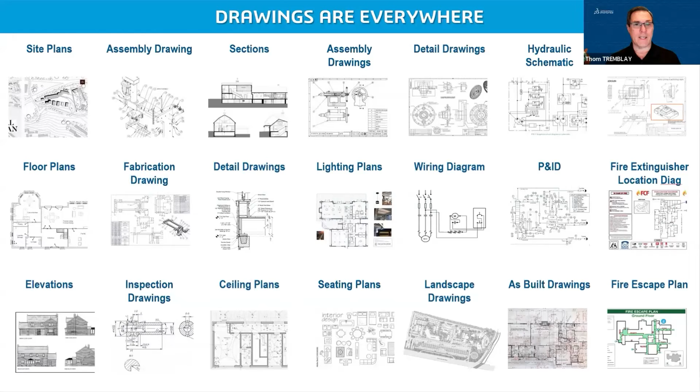There are simply things that are easier to do in 2D, especially in skilled trades, where a schematic or a simple representation can communicate the information needed to get the work done. On the other end of the spectrum are things too complex, even with all our computing power, even with distributed computing, even with the power of platforms like the 3D Experience platform, to capture effectively in 3D. So again, 2D to the rescue, and we don't see an end to this because it's just not going away.

So what does that mean for students? Well, the first thing is jobs. We talk a lot about 3D, but if you take a look at job postings from the last 12 months, you'll see the trend we've seen for years continues: anywhere from 3 to 4 times the number of people are looking for AutoCAD or 2D skills versus SolidWorks. This isn't to demean SolidWorks or say it's not a critical skill, it's just that there are so many more jobs.

That's why we need to keep this effective in our classrooms and make sure students have options and flexibility. I even included Indiana at the bottom because that's the highest concentration of manufacturing in any state in the United States, and even there you'll see double the number of ads. So equipping our students for the future and giving them the most options requires that they still understand 2D.

So let's talk a bit about what DraftSight is. DraftSight is a best-in-class 2D CAD solution. We're focusing on DWG, and we'll talk more about that going forward, but we also want to include some flexibility. For example, we work with 64-bit Windows or Mac OS. We also allow standalone licensing.

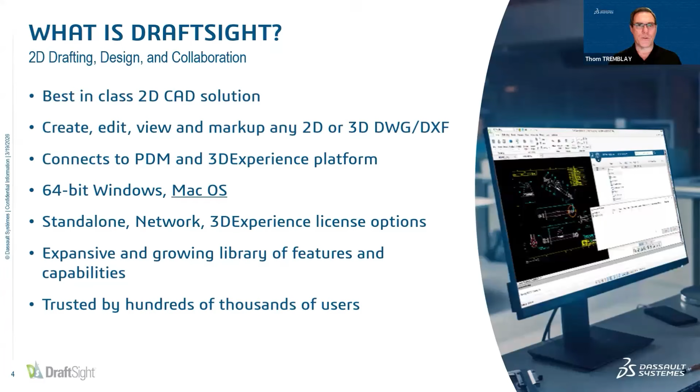We have hundreds of thousands of commercial users around the world already using DraftSight. Now let's talk about the nuts and bolts of how you start using DraftSight in your classroom.

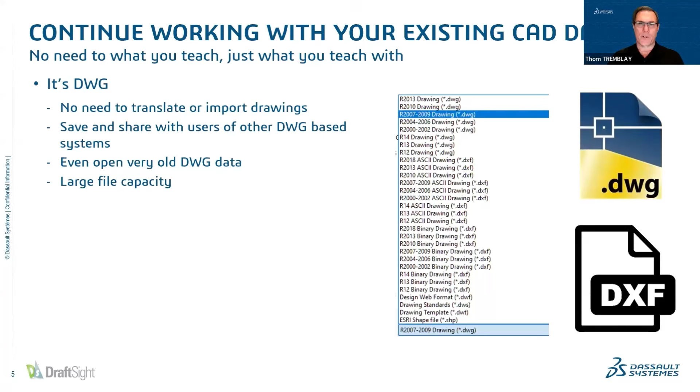First off, I mentioned briefly DWG—it is still a DWG file. In fact, it's still 100% compatible with any AutoCAD DWGs you already have, or if you're using another DWG-based 2D CAD program. So you're not having to recreate all your data for your lesson files. Any block libraries, any attributes in the blocks, if you're using dynamic blocks—which is a great tool to teach, and we have our version called custom blocks—we can reuse existing dynamic blocks.

Once again, you're not having to start over to transition your classroom to DraftSight. And of course, we're using the same viewports and layout workflows. We have external references. So what it boils down to is you can just keep using the same lesson files you already have prepared.

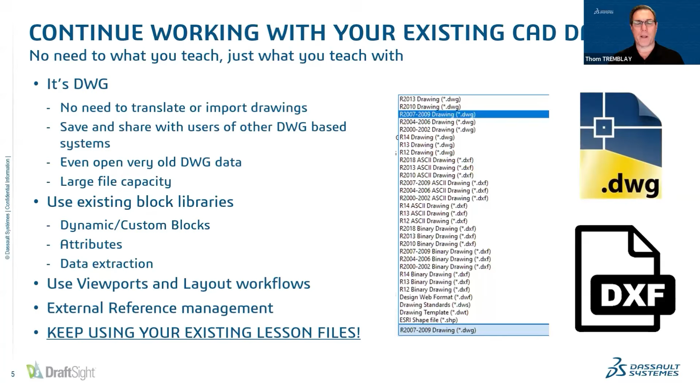That also means you can preserve your skills—you're not having to relearn a whole new tool to start working with DraftSight. Now, DraftSight does have some differences, but we work very hard to maintain a consistent workflow and workspace. It's customizable if there are certain things you prefer, like tool palettes or certain toolbars being open. You can make all those same customizations in DraftSight and work the way you're used to working and teaching. There's command consistency—we have command aliases. I mentioned there are slight differences between DraftSight and, let's be upfront about it, AutoCAD.

We'll focus on that, but where there are differences, we use our aliases. For example, there is no purge command inside of DraftSight. We have the same tool that does the same thing, but it's called clean.

In DraftSight, if your muscle memory kicks in and you start typing purge, it will subtly offer you clean in parentheses. But if you finish typing purge, or get that to highlight in your quick access menu and press enter, you will get the clean tool. It works just like purge, just like the tool you're used to teaching your students to get rid of all that extra stuff out of their drawings. We just have a different name for it.

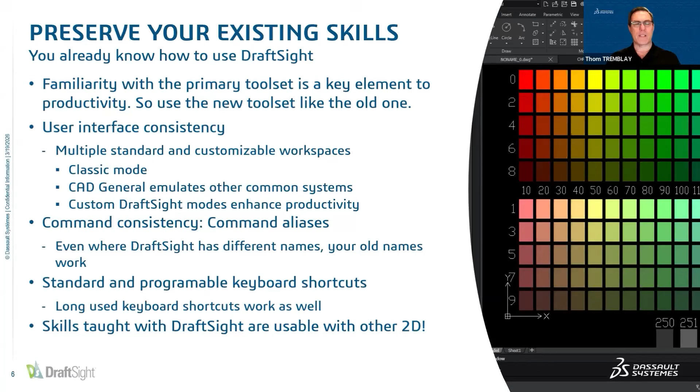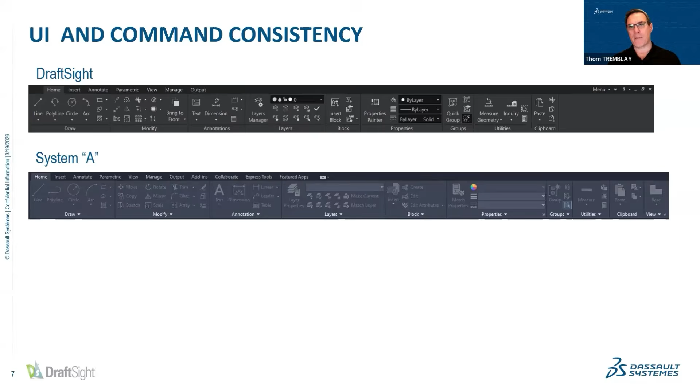I mentioned command consistency. I just wanted to give you a feel for the UI consistency, especially since you might be transferring your lesson files and want to practice and make sure you're comfortable. Here, for example, is the optional interface for DraftSight that we specifically made to map out and look like AutoCAD.

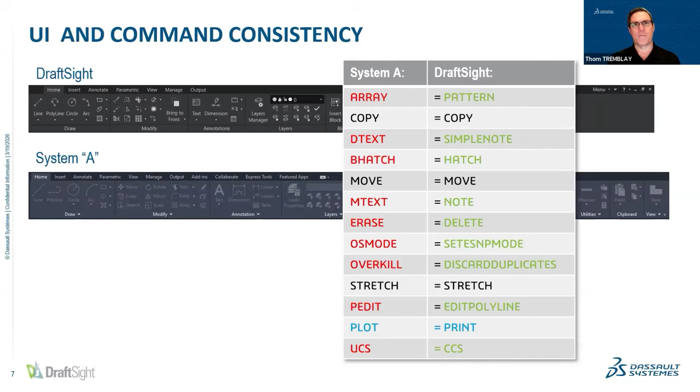And these are command aliases. So you can see we don't have the array tool, we call it pattern. But if you type array, you get pattern, and it works the same. The dialogues look the same. You're going to be able to just be productive from day one. That's really one of the key elements in the commercial space that we succeed with DraftSight: we are the non-disruptive change.

For some of you teaching Revit and who might want to give students an opportunity to learn how to make detailed drawings from the Revit data, our Enterprise Plus and Premium offering, depending if it's network or standalone, has the ability to take RVT files, or if you're teaching CATIA for BIM, the IFC files, and break those down into sections, elevations, details, do scheduling, do all of that work directly in DraftSight from those 3D files. And if those 3D files are updated, you can update the links and it will update the drawings.

It's a really nice workflow, but we are very highly focused on making sure that DraftSight is not only competitive, but starting to step out away from the pack and create new feature capabilities that offer our commercial customers great new workflows that can benefit the classroom as well.

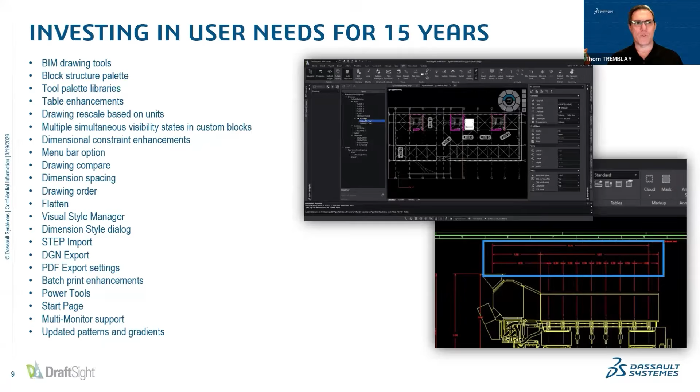I mentioned flexibility. We do have the ability to do network licensing. So if you're used to having labs where you shared licenses across multiple labs, we can go back to that. We also have standalone, as I mentioned. And for those labs already using SOLIDWORKS on a network license, DraftSight works on that same SOLIDWORKS network license manager, so you're not having to stand up a new instance or a new license manager. It's just compatible and ready to start working.

We also have certifications available. We already have an associate level DraftSight certification, which is a great asset for students to have, as well as we are in our final stages of finishing our professional certification.

We did betas this year and last year at 3D Experience World, and I took the exam. I passed it, which is probably to be expected, but nonetheless it's a great tool and it's going to be ready to go before next school season. We should have the professional certification as well. Of course, students, you might want to focus on associate. We've had that up and running for about 3 years now, so it's a standing certification available to you today and available to your students.

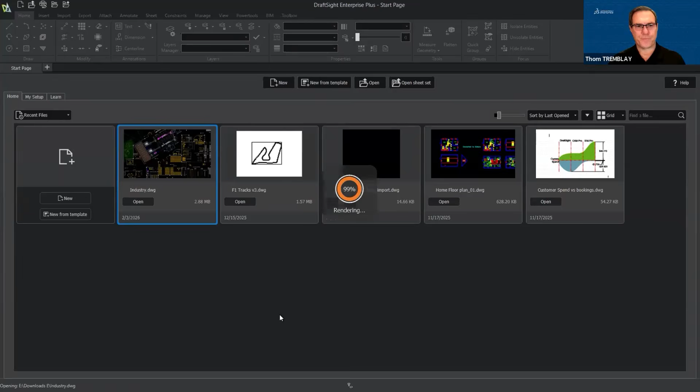Very familiar interface. Let's open up a simple little drawing here. Let's take a look at the interface itself. This is our standard drafting and annotation interface. This is one that we developed based on the most commonly used tools, puts it right up front. I do recommend teaching from this interface.

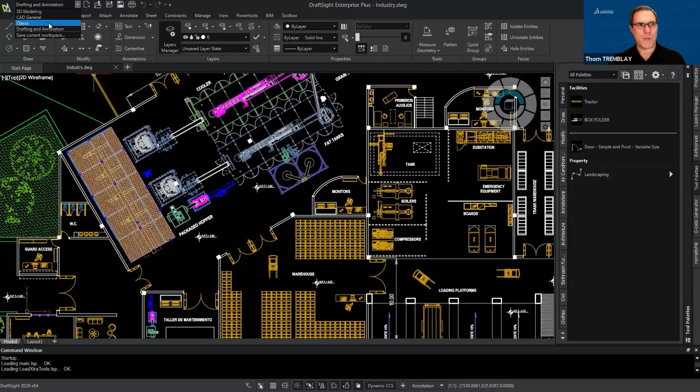However, just to get it right out there in the open, we also have our other workspaces. We have a classic workspace, which is more toolbar focused. And then we also have our CAD General interface, made to make existing AutoCAD users more comfortable getting started. It puts that command layout in very familiar positions. We do have the option of drop-down menus as well.

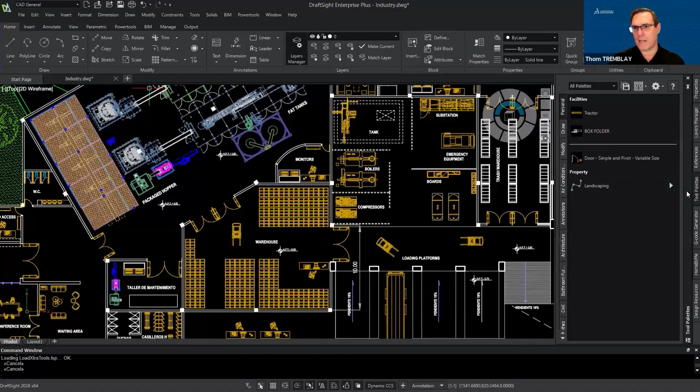We have the option of our tool palettes, which of course are working the way they should, and they still work like tool palettes you would expect, being able to go in and make quick modifications.

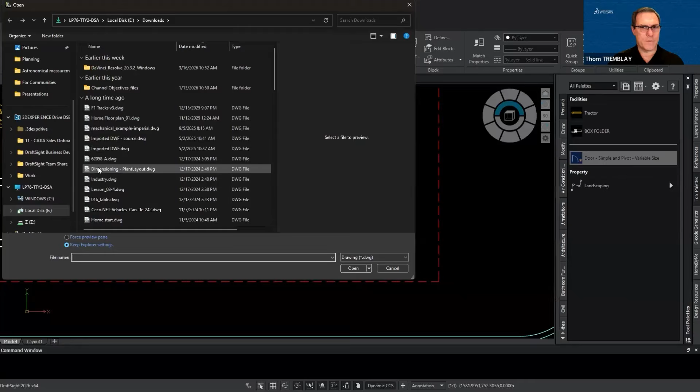This is not the drawing I was looking for, but yeah, being able to develop your model, any of the same tools work. If you're working with blocks, edit properly. If you're working with things like dynamic blocks—sorry, wrong drawing, pardon me for a moment. Oh, that's not the one either. We'll just stick with this.

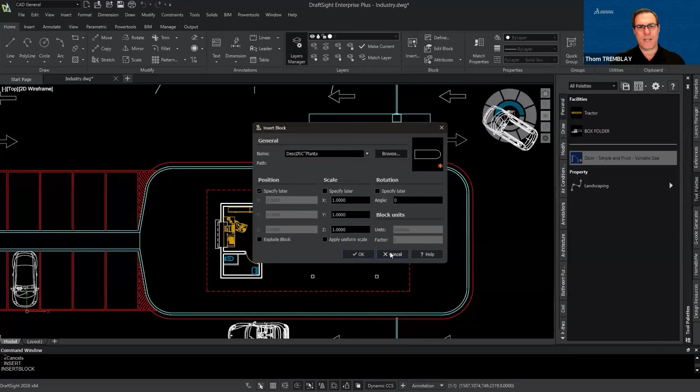But dynamic blocks, any of your command line tools, insert, you get your pop-up menu. You'll have the blocks that exist in here. Being able to select works the same way, being able to specify scale, position, rotation, on screen or in advance, so the dialog boxes are going to work the same. Layers management is the same properties.

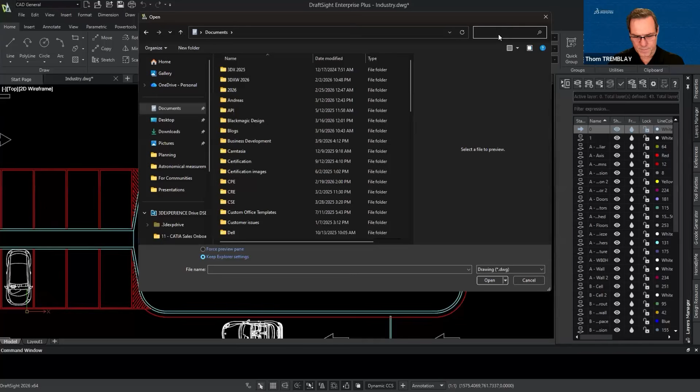If you're concerned about older data that you might have lying around, let's go ahead and open a file. See here, see if I can find myself. Where are all my stuff? I lost all my stuff. What on earth is going on? Oh, let's search for something. There we are, I'm sorry.

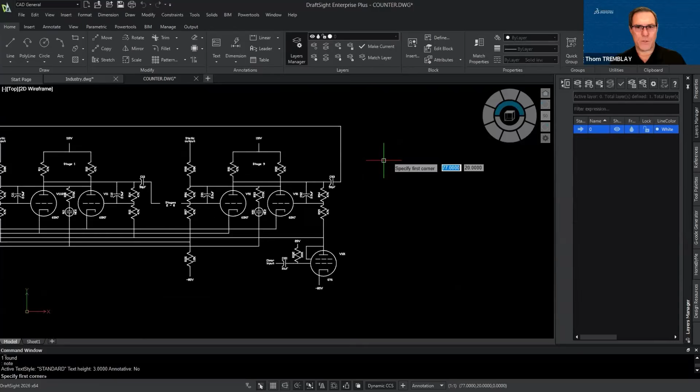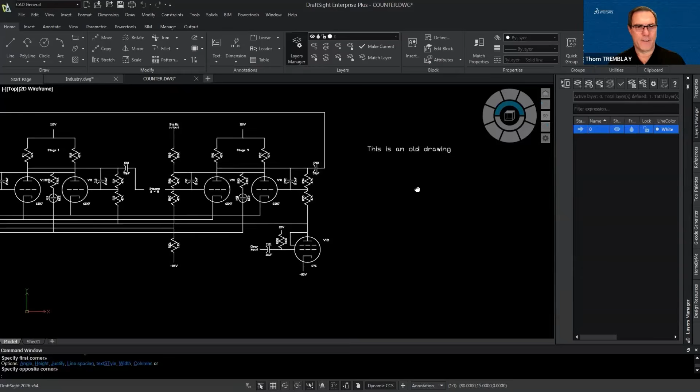So here we have a file from September of 1987. Not sure how many people on the call were around in September of 1987, but this is an old DWG file. If I go to modify anything, let's go to this block, maybe change some of the block attributes. They update just like they would have back in 1987, but we can go in and apply a note, which is our version of mtext. Maybe make this a little more reasonable. Let's try something in between. And now we're able to save that, continue working with it, doing whatever we like to do.

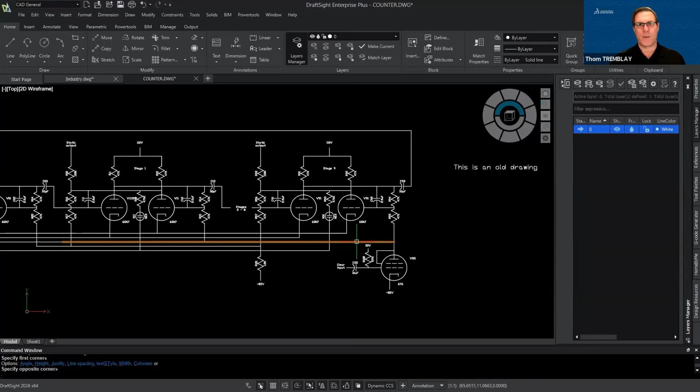Can DraftSight automatically make a 2D file after importing from SOLIDWORKS? If you take a STEP file or a SAT file from a 3D modeling system, we have a tool that can make a flat pattern, or 'make flat' snapshot is the tool. It will generate the hidden line views. You can have it automatically assign object lines to a specific layer, hidden lines to a specific layer. Based on your point of view of the model, it will go ahead and create those orthographic projections for you. It is not associative in the sense that a SOLIDWORKS model would be, but it can be a good exercise for students to see that there are people who still use that workflow where they detail their 3D models from SOLIDWORKS in tools like DraftSight.

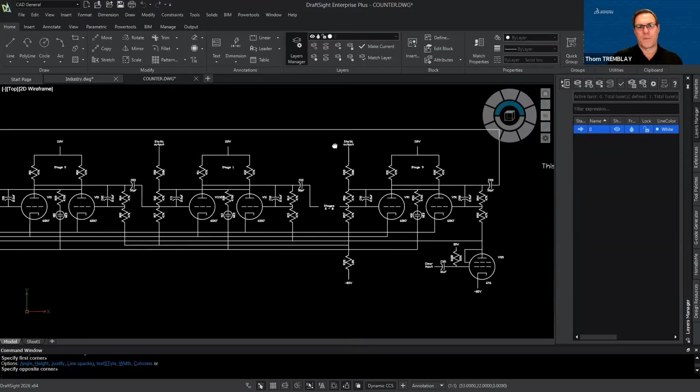The question is, if you have a license for SOLIDWORKS, do you get DraftSight, or is it separate? It is separate. One thing to note though, yeah, it's a separate license.

Let's see if I can find my proper drawing. Yeah, that's the one I was hoping to show.

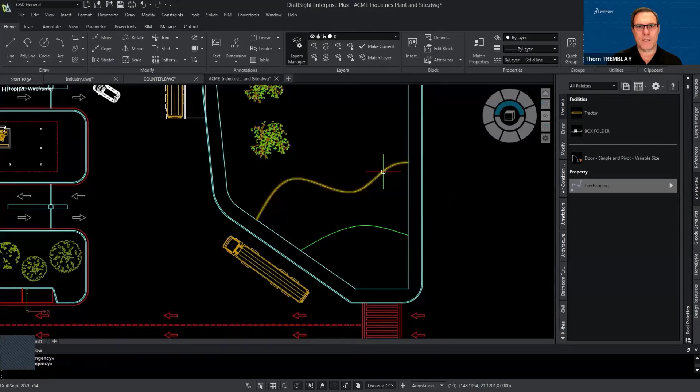I don't know if all of you are comfortable with tool palettes, but for example, if I'm working in layer 0, which is where I always draw everything, I can build tools into the tool palette. I have access to what's called E snaps in DraftSight rather than O snaps, but they work exactly the same. For nearest, a shift right click gets me to that menu, and I can drop that in. I've just created this spline on the correct layer for that type of work without having to change the layer in advance. And then, of course, we have our block capabilities.

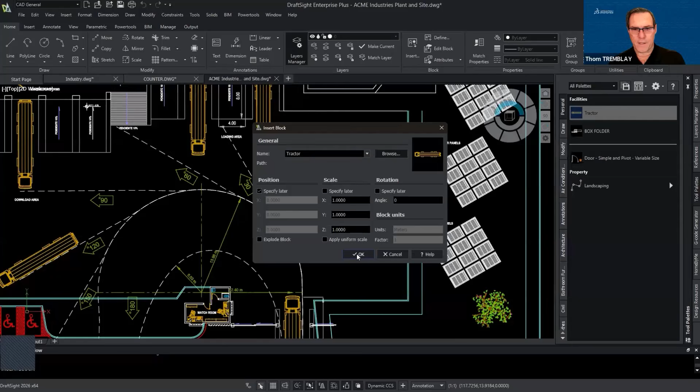If you want to use things like the pattern tool, or tools like copy, we now have command line options where we can pick and say that we want to create a pattern with 5 elements based on a fit. So we can say we want to create our pattern up to there and drop all those in. Exactly the same workflows you're used to.

This looks like AutoCAD. Is it better? If someone asks you why to choose DraftSight, why would you say, sir?

Honestly, the key with DraftSight is really just the association with Dassault Systemes, being able to work with the same team, the same education team, being able to partner with it. We are not trying to create a tool that's radically different. At this point, we are adding some tools like the BIM capability, which kind of stand apart from AutoCAD. But right now, we're trying to address the needs of our customers that have 2D for commercial users.

One of the points that's a benefit of DraftSight is the extraordinary difference in price. Commercially, a seat of AutoCAD will set you back now $2,090 a year, and you must buy it every year or you cannot work, and everyone who touches it must have a dedicated license. For a lot of our SOLIDWORKS customers still making the transition from AutoCAD to DraftSight, that's an incredible burden on their budgets and limits their ability to give raises and make investments in the company. We're offering a tool that starts at $599 for that same level, or slightly higher level, of functionality.

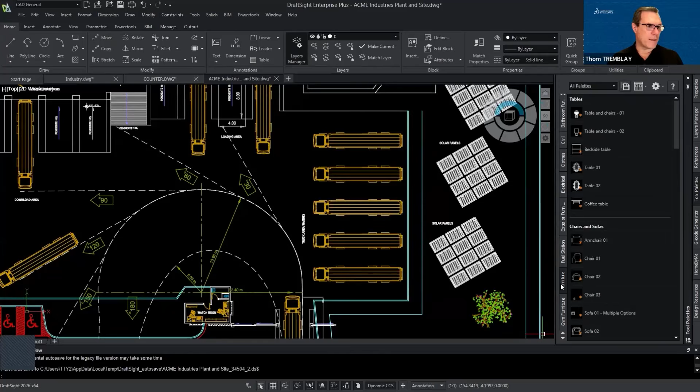Okay, any other questions?

Like I said, our goal here is not to reinvent the wheel, it's to make it easy to transfer your skills and your data over to a new tool that is from Dassault, from the SolidWorks team, the education team, and get you up and running on a unified environment, and hopefully able to start working with things even this next semester.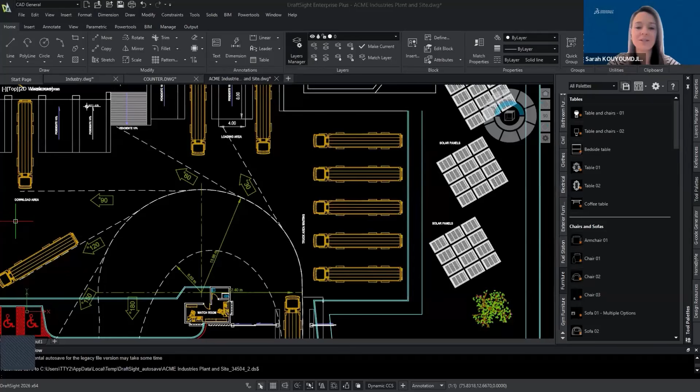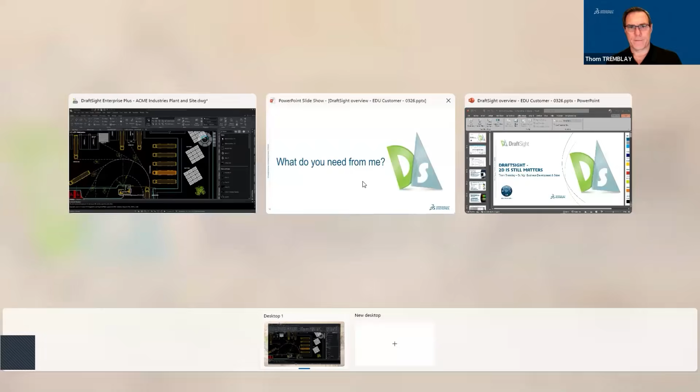Is there a free trial? Yes, there's a 30-day trial available online, and you can download that. You can work with your partner, get your education partner, to get a hold of a trial version.

Another question is, you can design in SolidWorks and save it as DWG - why use DraftSight specifically? Well, you kind of answered your own question in a way. Why would you save it as a DWG if not for the need for the company or the user to be able to make modifications to the DWG? And that's where DraftSight steps in.

Also, in manufacturing environments, we see SolidWorks dominate in the engineering department itself, the core product definition. That is where SolidWorks lives, whether it be coming from a mechanical engineering and design perspective or an industrial design perspective. But once that product gets defined, you'll find that throughout the rest of the process - whether it be planning the manufacturing, planning the packaging, planning the distribution, maintaining and managing the equipment that produces the product - that is almost entirely 2D.

I've had the opportunity to go on site at some of our best customers, both on the CATIA side and the SolidWorks side, and core engineering is 3D - the rest of the process is 2D. This is why I say it's still a critical skill for students to learn, and it's a very powerful vocational attribute for them to have - exposure to 2D and an understanding of what the workflows are.